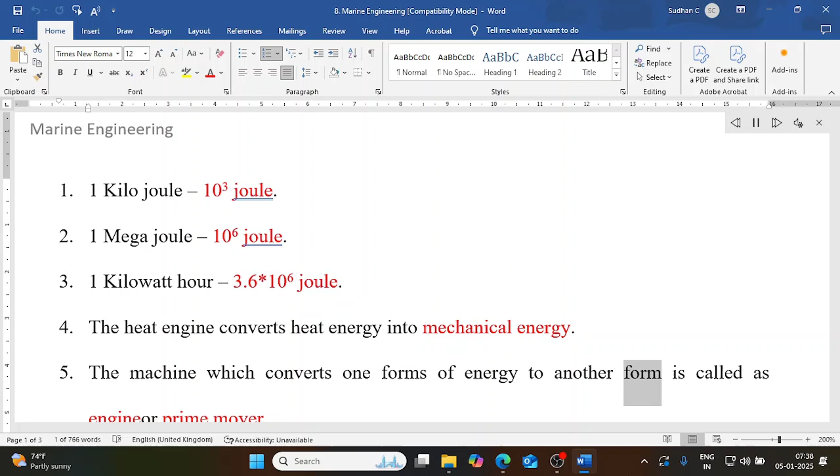1 kilojoule = 10^3 joule, 1 megajoule = 10^6 joule, 1 kilowatt hour = 3.6×10^6 joule. The heat engine converts heat energy into mechanical energy. The machine which converts one form of energy to another form is called an engine or prime mover. Fahrenheit scale is called British thermal unit and denoted by BTU.

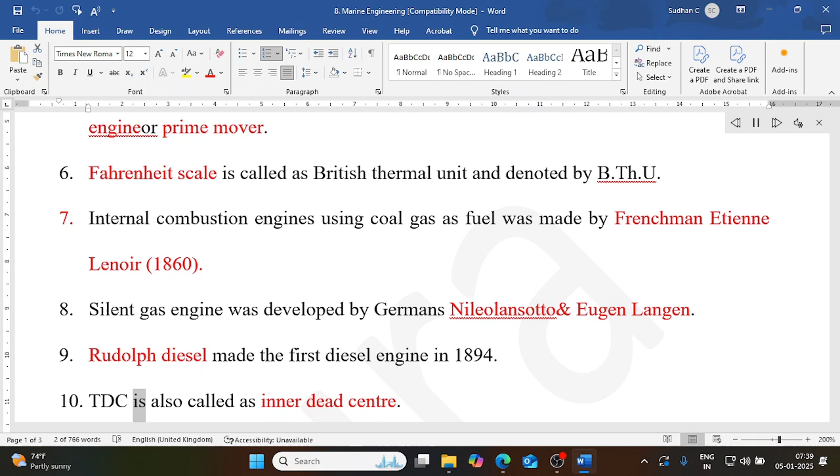Internal combustion engines using coal gas as fuel were made by Frenchman Etienne Lenoir, 1860. Silent gas engine was developed by Germans Nikolaus Otto and Eugen Langen. Rudolf Diesel made the first diesel engine in 1894. TDC is also called inner dead center. BDC is also called outer dead center.

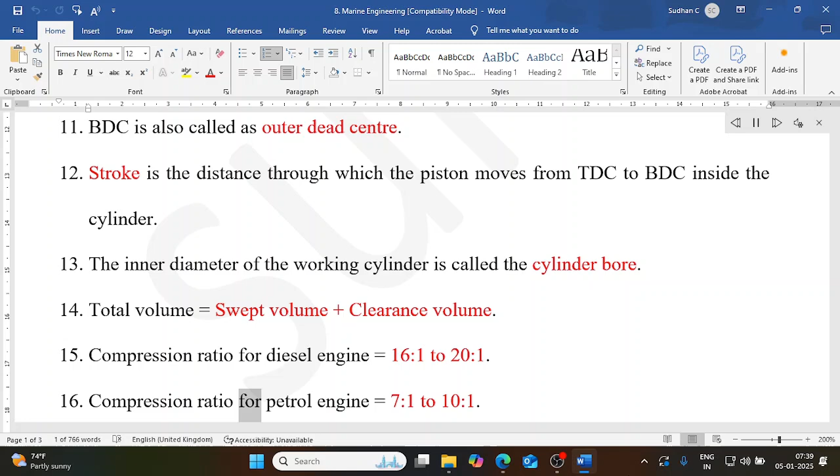Stroke is the distance through which the piston moves from TDC to BDC inside the cylinder. The inner diameter of the working cylinder is called the cylinder bore. Total volume is equal to swept volume plus clearance volume. Compression ratio for diesel engine is 16:1 to 20:1. Compression ratio for petrol engine is 7:1 to 10:1. Suction stroke: piston moves from TDC to BDC.

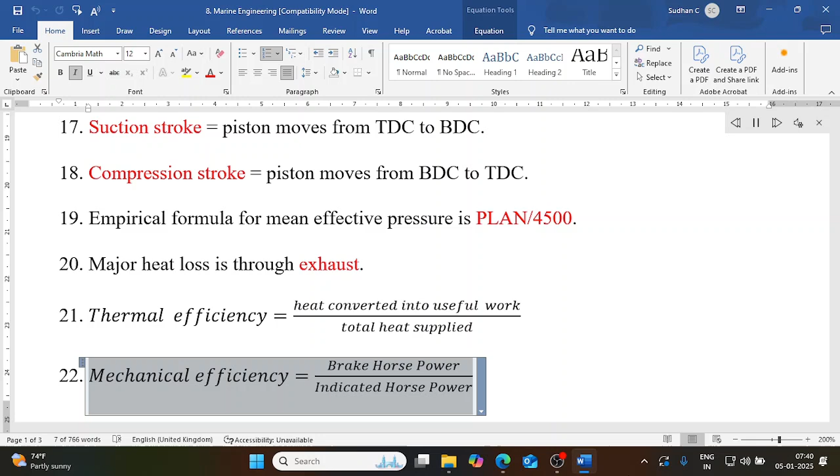Compression stroke: piston moves from BDC to TDC. Empirical formula for mean effective pressure is PLAN/4500. Major heat loss is through exhaust. Thermal efficiency equals heat converted into useful work over total heat supplied. Mechanical efficiency equals brake horsepower over indicated horsepower.

Volumetric efficiency equals volume of air actually drawn inside the cylinder over theoretical volume of air the cylinder can hold. The structural base of the engine is formed by the bed plate. The longitudinal and transverse plates of the engine are called girders.

Side clearance is the clearance between the piston ring and ring groove on the piston. End clearance is also called butt clearance. The pin which connects the small end of the connecting rod with the piston is called gudgeon pin or piston pin. The rod that transmits the motion of the cam to the rocker arm is called push rod. Exhaust manifold collects the burned gases from each cylinder. Silencer is used to reduce the sound of the engine.

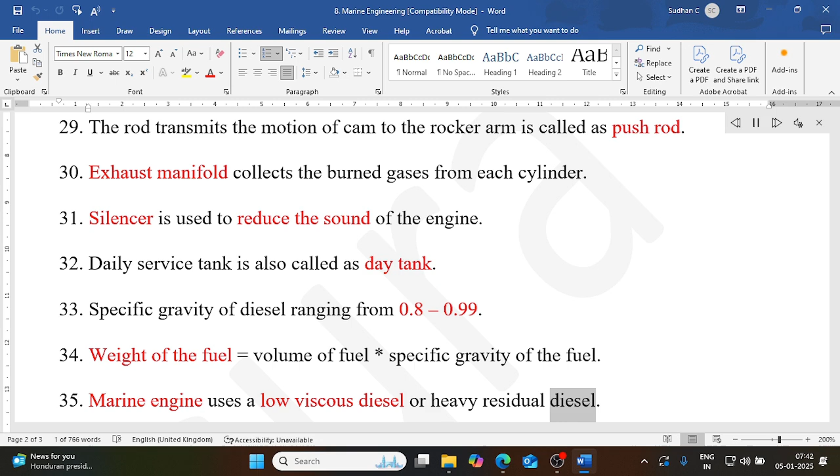Daily service tank is also called day tank. Specific gravity of diesel ranges from 0.8 to 0.99. Weight of the fuel is equal to volume of fuel × specific gravity of the fuel. Marine engines use a low viscous diesel or heavy residual diesel. The fluctuation of the speed from the set point speed is called hunting. Snap tank is mainly used for calculating the rate of flow of fuel to the engine. Flow meter is a meter used to measure the fuel consumption of a marine diesel engine.

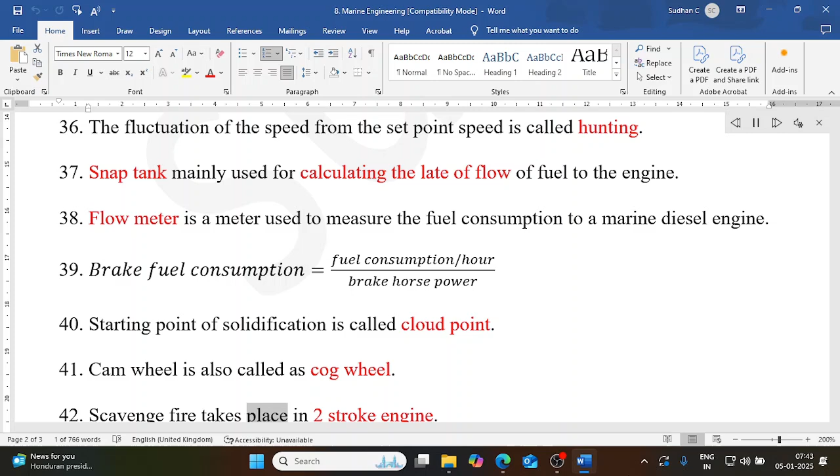Brake fuel consumption equals fuel consumption per hour over brake horsepower. Starting point of solidification is called cloud point. Cam wheel is also called cog wheel. Scavenge fire takes place in two-stroke engines. 1 watt is equal to 1 joule per second. 1 horsepower is equal to 746 watts. 1 kilowatt is equal to 1.3405 horsepower.

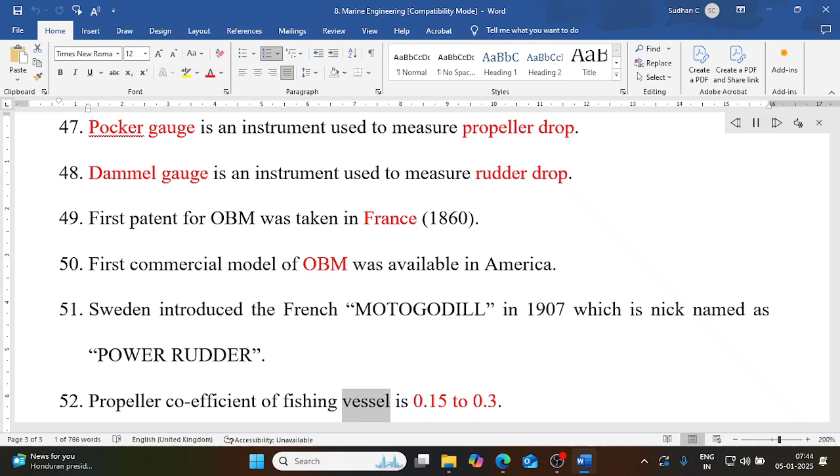Fixed pitch and variable pitch propellers are the two types of propeller found. Pocker gauge is an instrument used to measure propeller drop. Dammel gauge is an instrument used to measure rudder drop. First patent for OBM was taken in France, 1860. First commercial model of OBM was available in America. Sweden introduced the French Motogodill in 1907, which is nicknamed power rudder. Propeller coefficient of fishing vessel is 0.15 to 0.3.

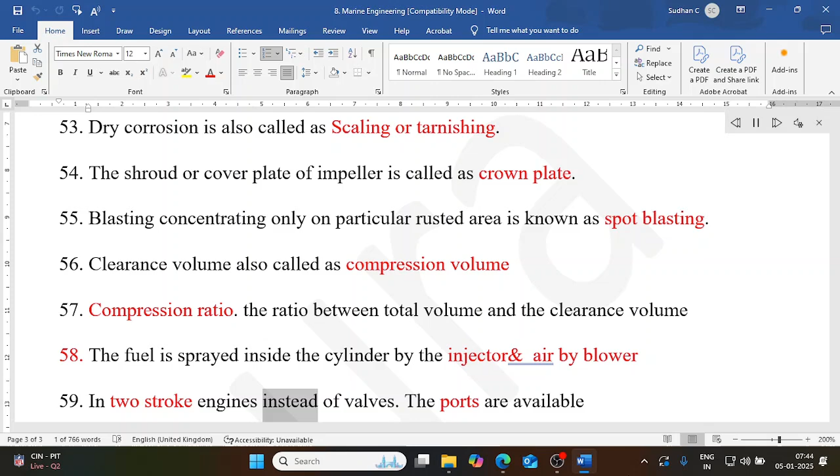Dry corrosion is also called scaling or tarnishing. The shroud or cover plate of the impeller is called crown plate. Blasting concentrating only on a particular rusted area is known as spot blasting. Clearance volume is also called compression volume. Compression ratio is the ratio between total volume and the clearance volume. The fuel is sprayed inside the cylinder by the injector and air by the blower. In two-stroke engines, instead of valves, ports are available.

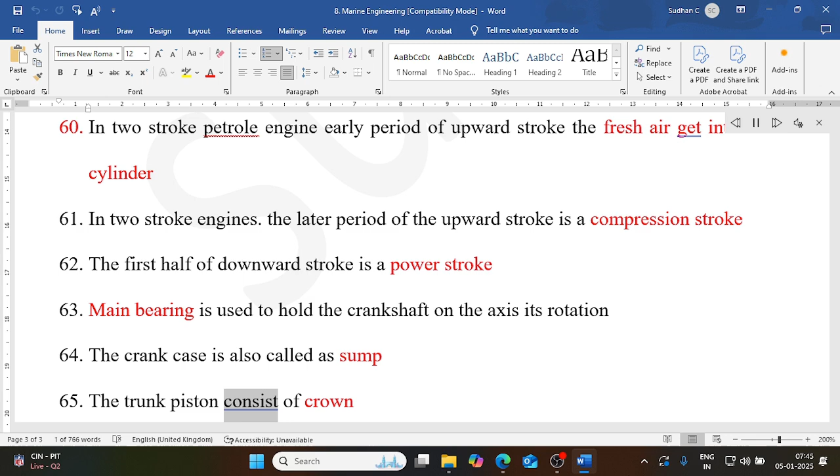In a two-stroke petrol engine, in the early period of the upward stroke, fresh air gets into the cylinder. In two-stroke engines, the later period of the upward stroke is a compression stroke. The first half of the downward stroke is a power stroke. Main bearing is used to hold the crankshaft on its axis of rotation. The crankcase is also called sump. The trunk piston consists of crown. Bunkering is the process of taking fuel in a vessel. Sounding is the process of measuring the quantity of oil present in the main tank. Sounding is done by sounding tape.